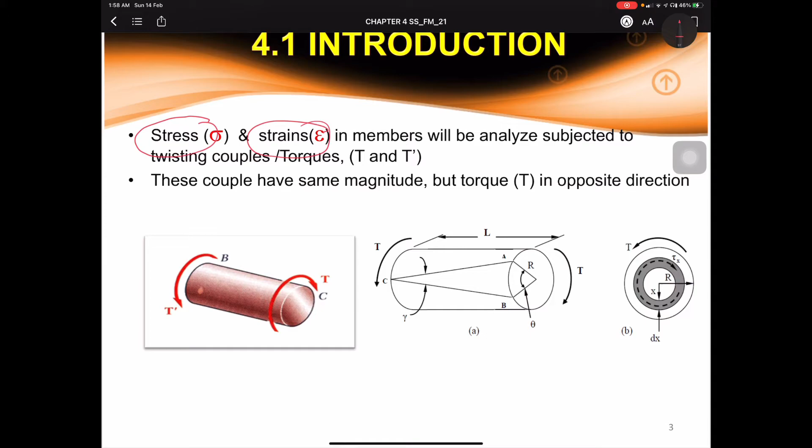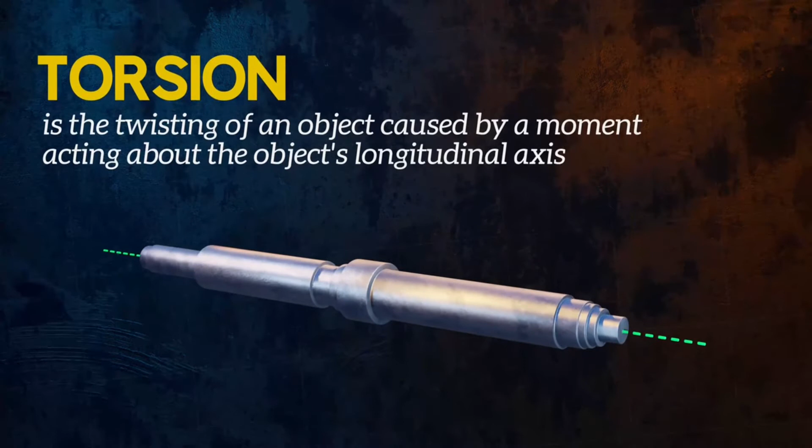Torsion is the twisting of an object caused by a moment acting about the object's longitudinal axis. It is a type of deformation. A moment which tends to cause twisting is called torque.

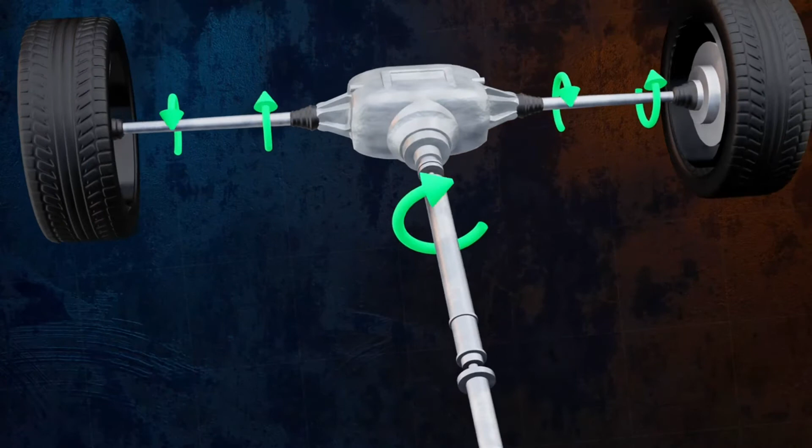A common example of an object subjected to torsion is the transmission shaft, which is used to transmit power by rotation. This could be the drive shaft and axles, used to transmit power from the engine of a car to the wheels, for example, or the shafts used to transmit power from the blades of a wind turbine to its generators.

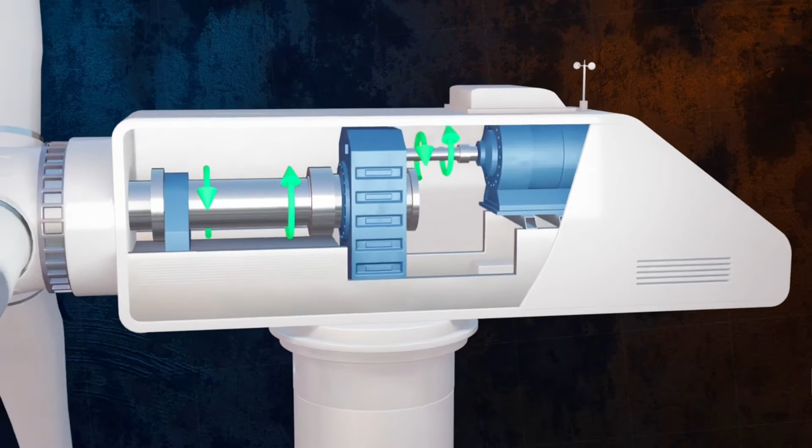Let's explore what happens when we apply torque to a circular bar. We can see that the applied torque causes the bar to deform by twisting. An interesting thing we can observe is that individual cross-sections of the bar do not get distorted by the twisting. We can imagine that the bar is made up of multiple individual discs, which rotate relative to each other when the torque is applied, but do not deform.

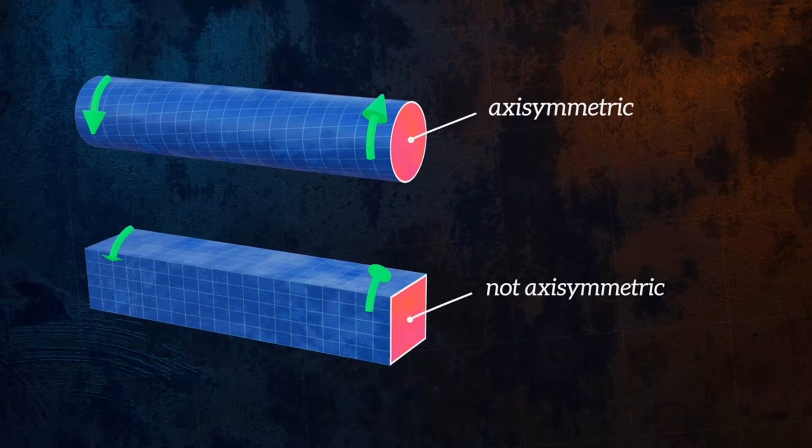This is only true because the cross-section of the bar is axisymmetric. A bar with a rectangular cross-section is not axisymmetric, and so torsion results in warping of the bar cross-sections. This warping is complex, so in this video we will keep things simple and only consider torsion as it relates to circular bars.

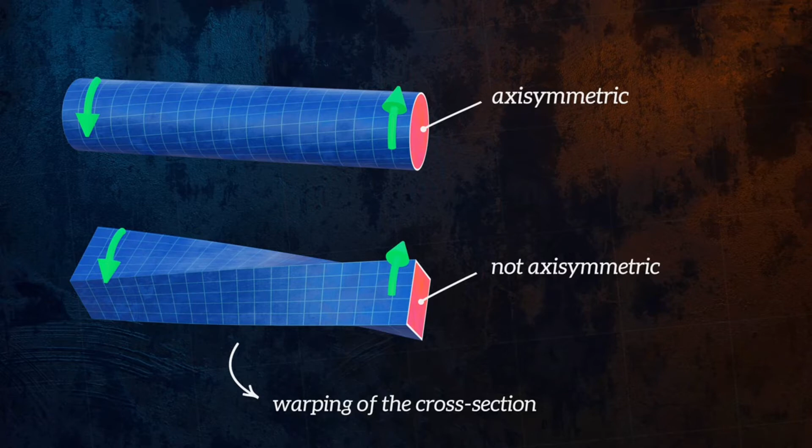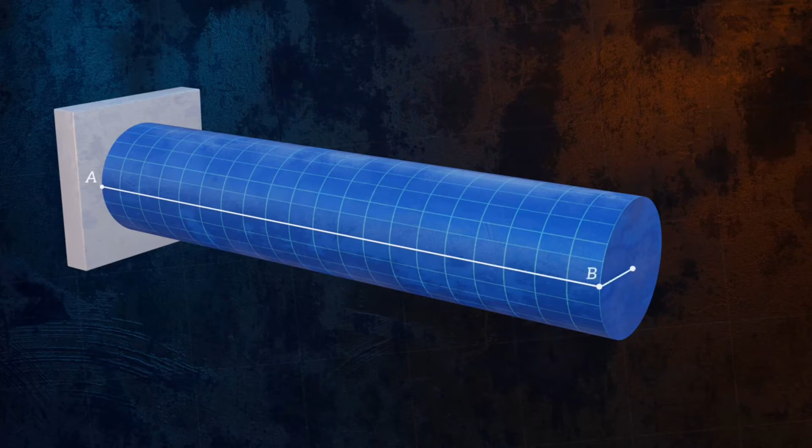Let's fix our bar at one end, and track how a line between point A and point B deforms as we apply a torque to the other end. The applied torque causes the free end of the bar to rotate by an angle phi. This is called the angle of twist. It varies linearly from 0 at the fixed end of the bar to phi at the free end of the bar. We can calculate the angle of twist using this equation.

It is a function of 4 parameters: the length of the bar L, the applied torque T, the shear modulus G, which is a material property, and J, which is the polar moment of inertia.

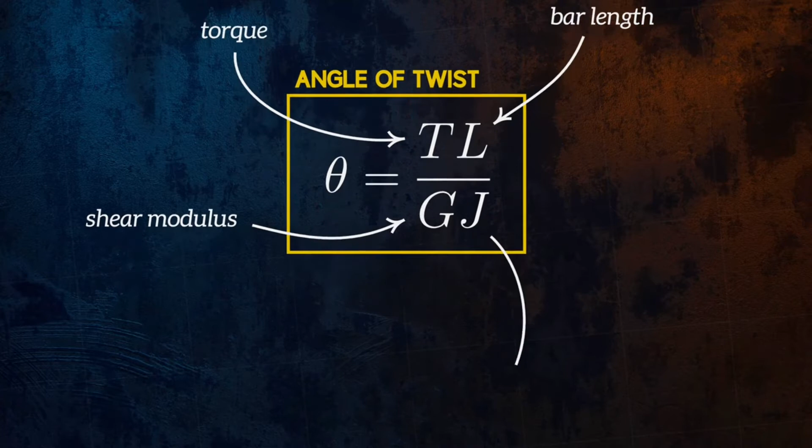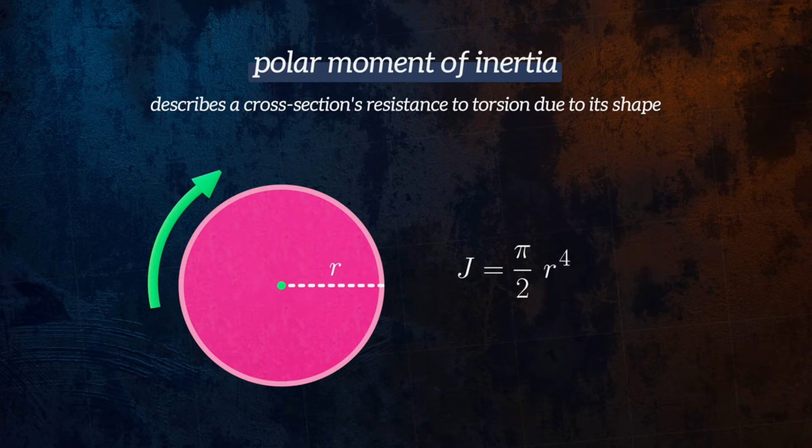One neat thing about the equation for the angle of twist is that it gives us a way to determine a material's shear modulus G experimentally. If we apply a known torque to a bar of known length and cross-section and measure the resulting angle of twist, we can use that information to calculate the material's shear modulus G.

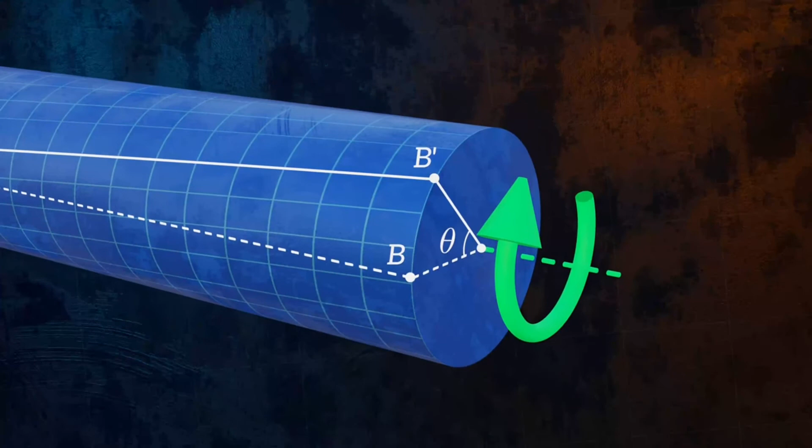Torsion generates stresses and strains within the bar, which we need to be able to calculate so that we can make sure our bar won't fail. To figure out how to calculate these stresses and strains, we can start by observing how a small rectangular element on the surface of our bar deforms. The element is initially rectangular, but when the torque is applied, it gets distorted.

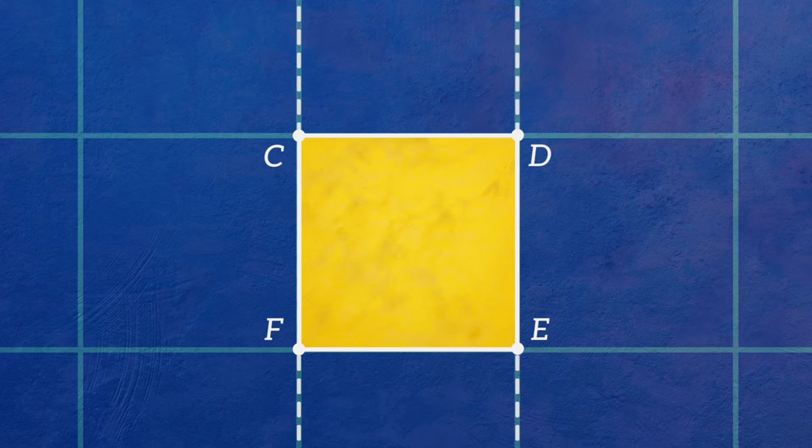Let's take a closer look. Because the bar is axis symmetric, we know that individual cross-sections will rotate but won't get distorted. So the sides CF and DE of the element will only move vertically along the lines shown here. After the torque is applied, the angles of the element are no longer 90-degree angles.

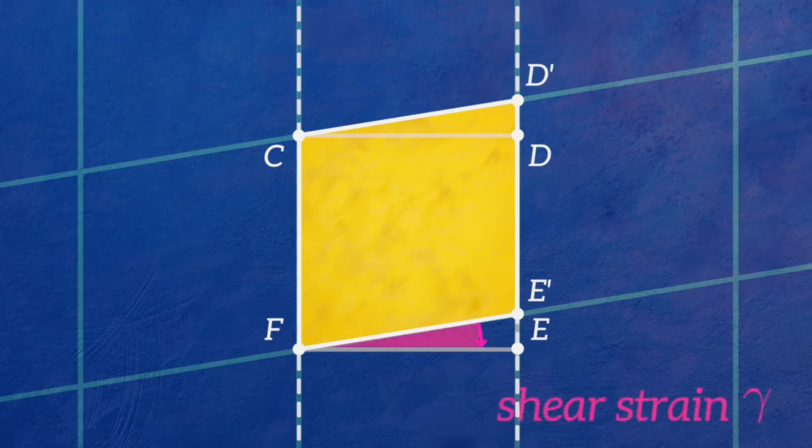This gives rise to a shear strain, which corresponds to the angle you can see here. We can calculate the shear strain by considering only the geometry of the bar in the deformation. It corresponds to this angle between AB and AB prime. We can use trigonometry to derive an equation for shear strain. For small angles, gamma will be approximately equal to the tangent of gamma, which makes it equal to the length BB prime, divided by the length AB.

AB is the length L of the bar. We can calculate the length BB prime by realizing that it is the arc length of a circle with a radius r, covering an angle equal to the angle of twist, theta. So the shear strain is equal to the radius of the bar multiplied by the angle of twist divided by the length of the bar.

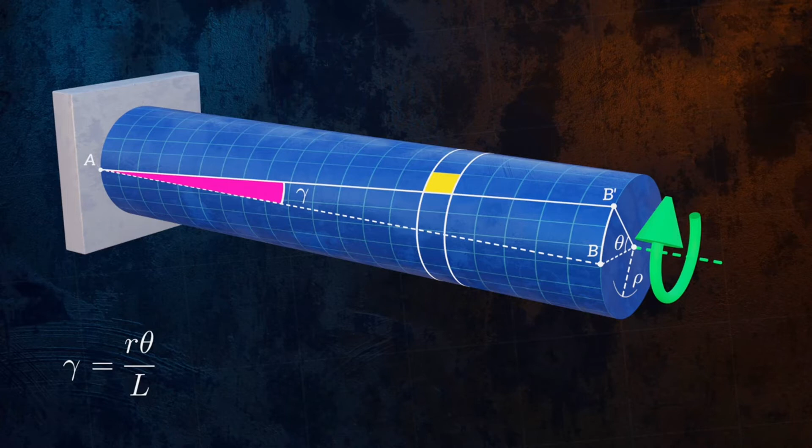This is actually only an equation for the shear strain on the surface of the bar. But what about inside it? It turns out that the shear strains increase linearly with the distance from the center of the cross-section. So if we define ρ as the radial distance from the center of the cross-section, we can replace r in this equation with ρ to give us an equation we can use to calculate shear strain due to torsion at any point within the bar.

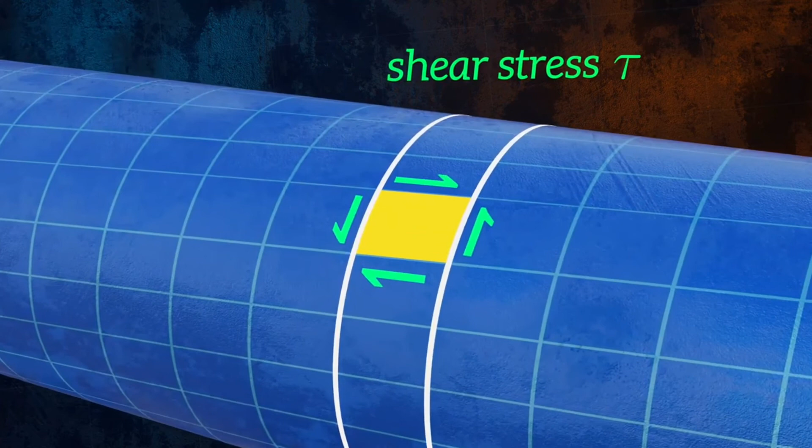That's shear strains covered. But what about shear stresses? Like the shear strains, shear stresses increase linearly with the distance from the center of the cross-section, with the maximum shear stress occurring on the outer surface, as you can see here. This is true for a solid bar, but also for a hollow bar. This is useful to know because it means that hollow bars are way more efficient at carrying torsional loads, since the central part of a solid bar is only resisting a small part of the total load.

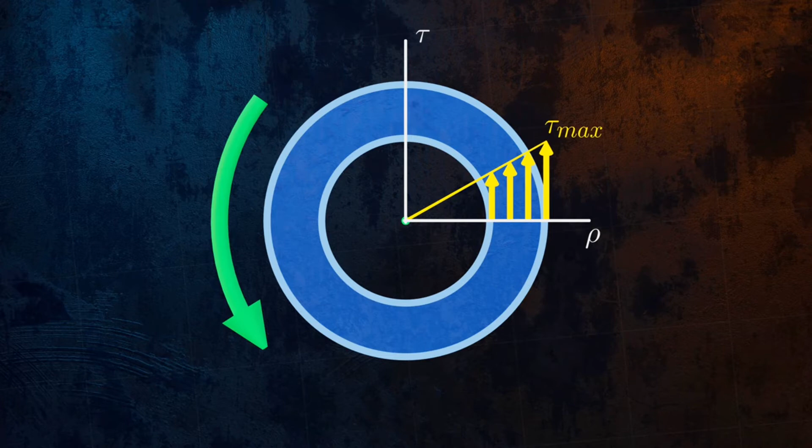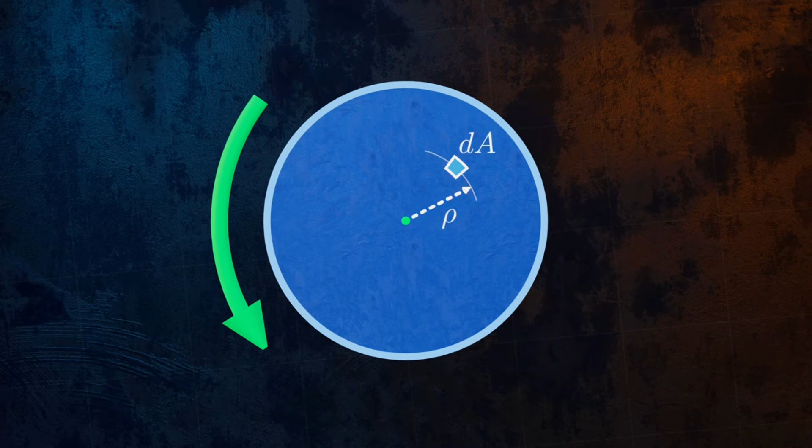Let's consider a small element within our cross-section that has an area equal to dA and is located at a distance ρ from the center of the cross-section. The internal force acting on this element is equal to its area, dA, multiplied by the shear stress tau. We can use this information to work out an equation for calculating the shear stresses.

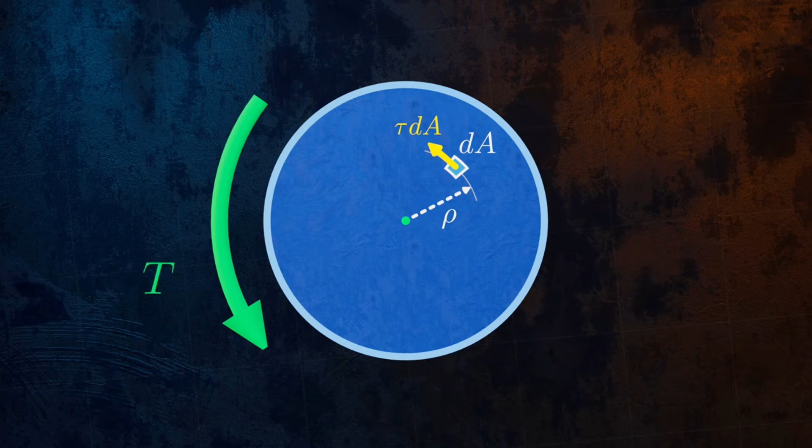The moments caused by the internal forces acting on all of the elements within the cross-section must sum up to be equal to the torque T. Otherwise, equilibrium is not maintained. We can represent that mathematically by this integral.

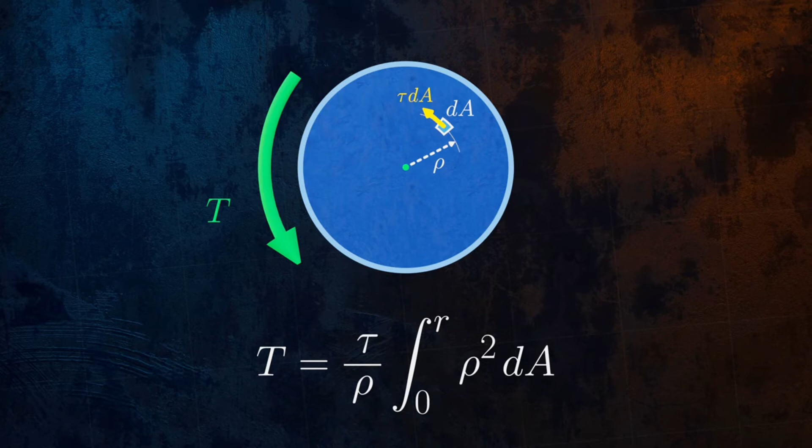We know that the quantity tau divided by ρ is a constant, because the shear stress varies linearly with the distance from the center of the cross-section. So we can rearrange the terms and move tau over ρ out of the integral. It turns out that the integral we now have on the right is actually the definition of the polar moment of inertia, so we can replace it with the letter J, and we can rearrange this to get an equation for shear stress.

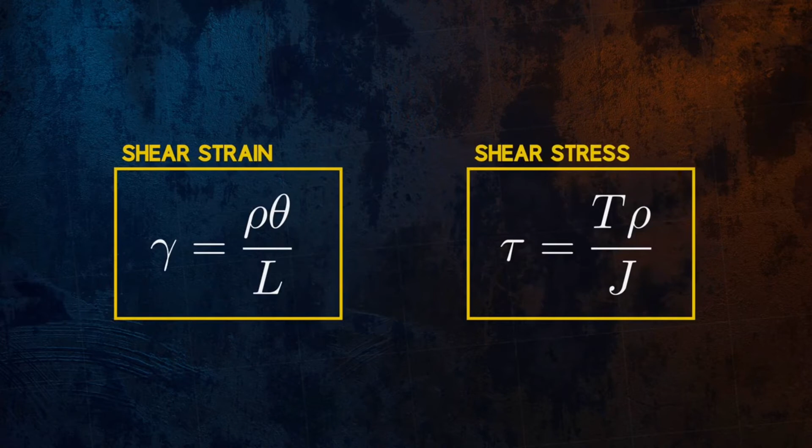The shear stress is a function of the torque T, the distance ρ from the center of the cross-section, and the polar moment of inertia J. It's quite a simple equation. So we now have equations that allow us to calculate the shear strains and shear stresses. We also have the equation for angle of twist that we talked about earlier. These three equations tell us everything we need to know about a circular bar which is under torsion.

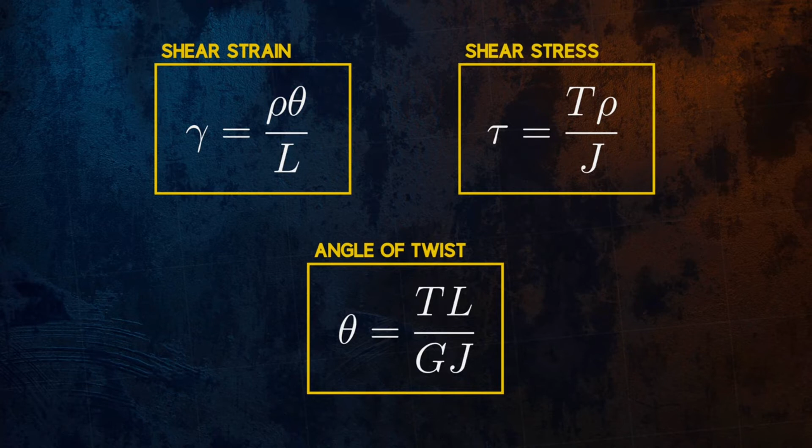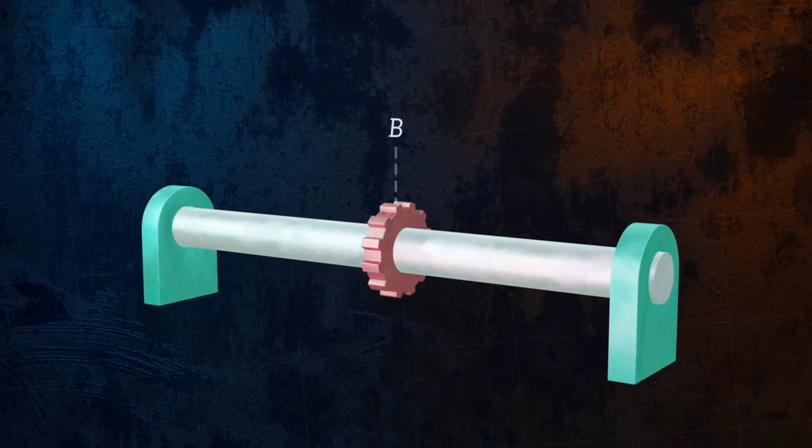So far, we have only talked about a uniform bar fixed at one end with a single applied torque, but shafts are often loaded by multiple torques. This shaft, for example, which is supported by bearings at both ends, is driven by a gear at point B, and in turn drives two gears at points A and C. It is loaded by three torques.

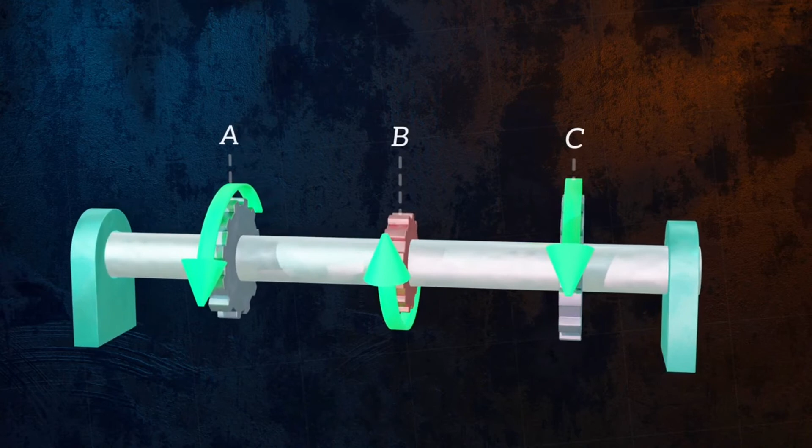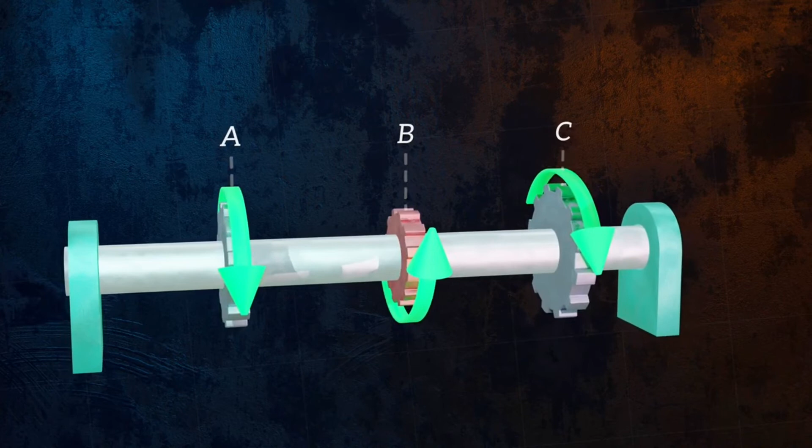Before we can use the equations for shear stress, shear strain, and angle of twist that we just developed, we need to figure out the internal torque at each location along the shaft. The process for doing this is similar to calculating the shear force along a beam, which I covered in a separate video. First, we draw a free body diagram. Then we make imaginary cuts and use the concept of equilibrium to determine the internal torque at different locations along the shaft.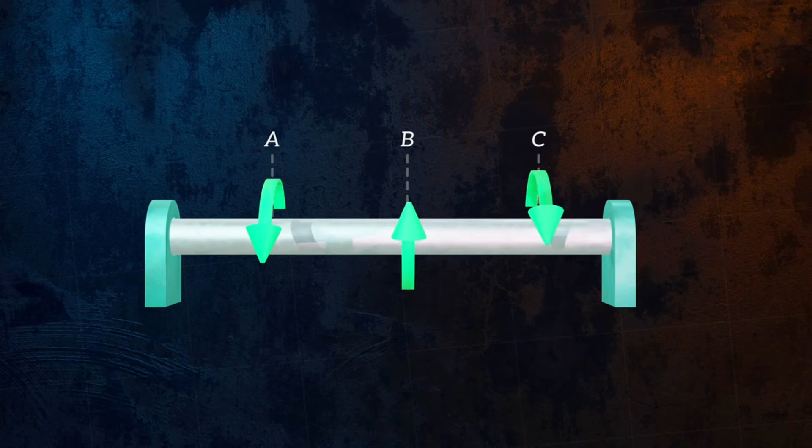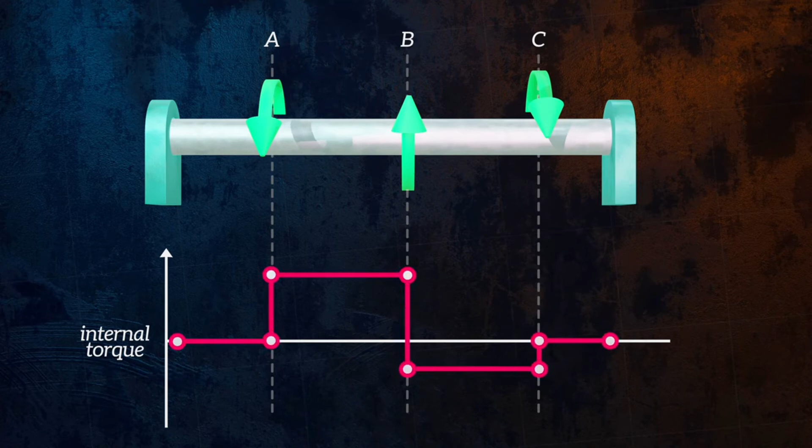The maximum shear stress will occur in the section of the shaft with the largest internal torque, and can easily be calculated using the equation we derived earlier.

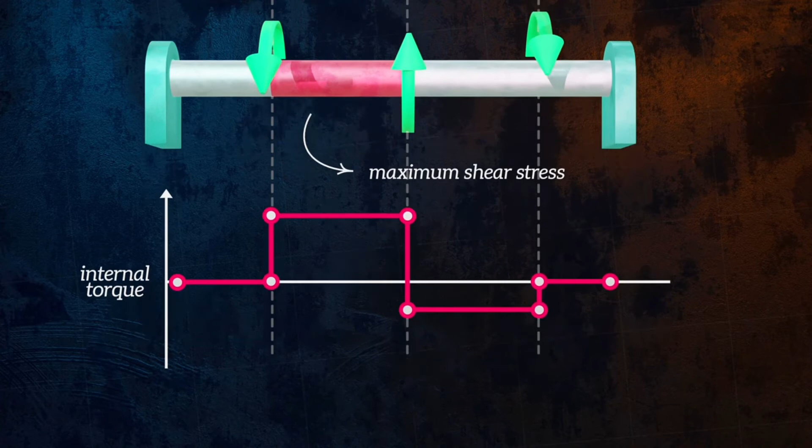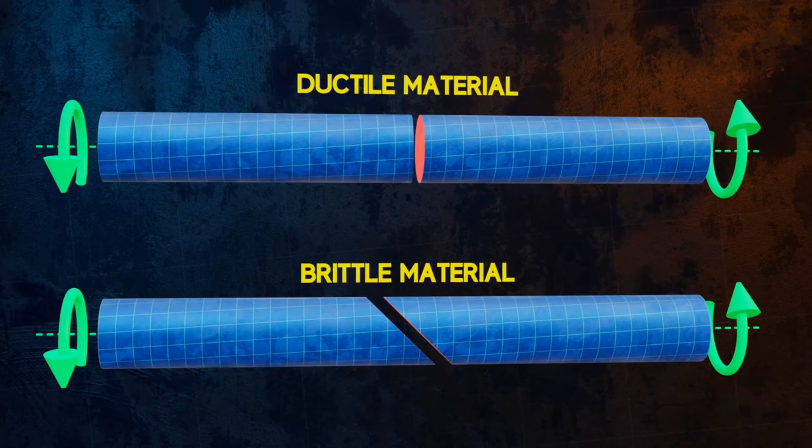I want to end the video by talking about failure due to pure torsion. If we have two bars, one made of a ductile material and one made of a brittle material, and we apply the same torque to both bars, we will observe that they fail differently. The ductile bar fails at an angle perpendicular to its axis, but the brittle bar fails at a 45-degree angle to its axis. We can explain this by remembering that ductile materials tend to fail in shear, and so fracture along the plane of maximum shear stress. But brittle materials are weaker in tension than in shear, and so tend to fracture along the plane of maximum tensile stress.

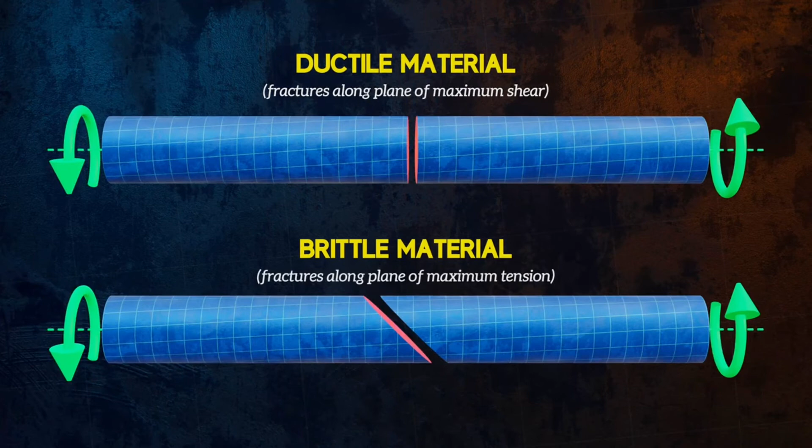Mohr's circle for pure torsion looks like this.

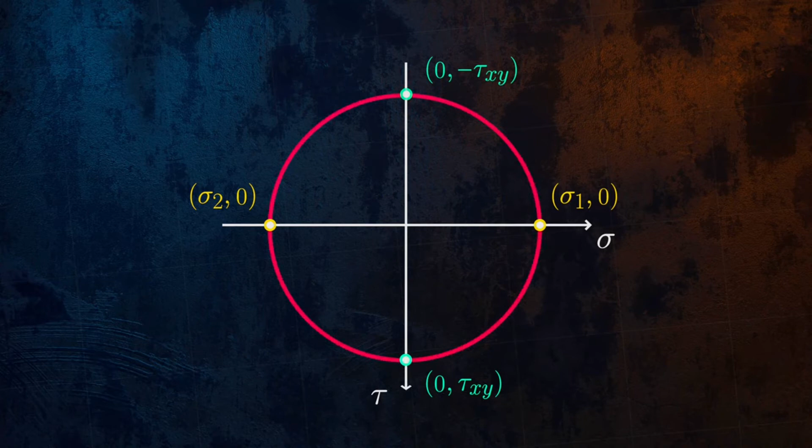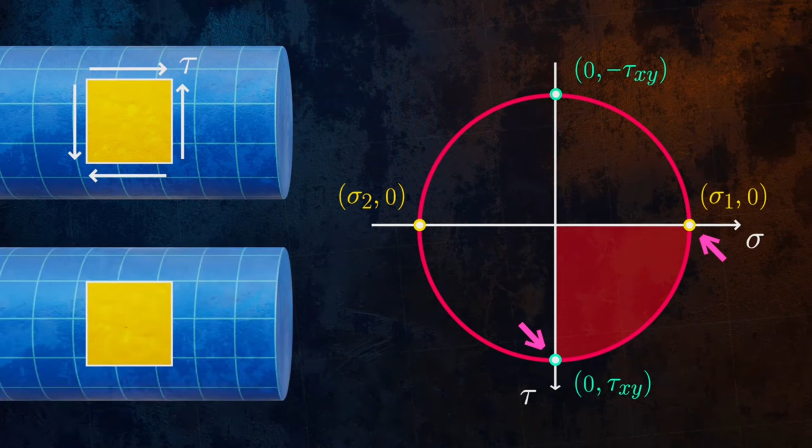We can see that when our stress element is oriented this way, the shear stresses are at their maximum values, and we have no normal stresses. There is a 90-degree angle on Mohr's circle between maximum shear stress and maximum normal stress, which means that normal stresses are at a maximum when our stress element is rotated by an angle of 45 degrees. This explains why brittle and ductile materials fail in different ways due to pure torsion.